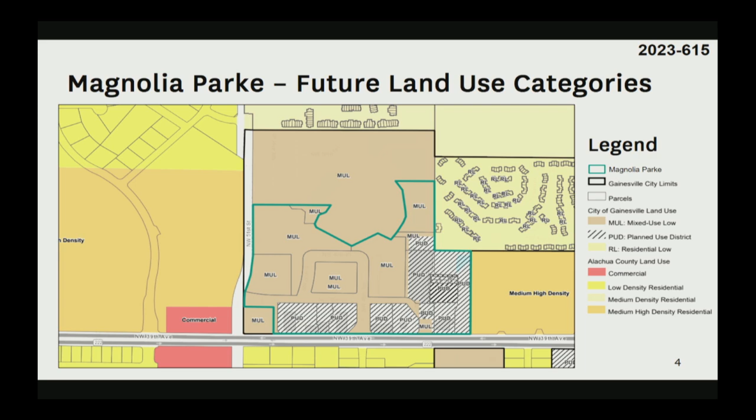Here's the existing future land use categories surrounding Magnolia Parke. Magnolia Parke is mostly mixed-use low future land use, with PUD being on the front in Pods A, B, I, and G, I believe. You can see the surrounding future land uses being a mix of multifamily, like medium-high density residential. There's county future land use surrounding the property, and some City of Gainesville future land use as well.

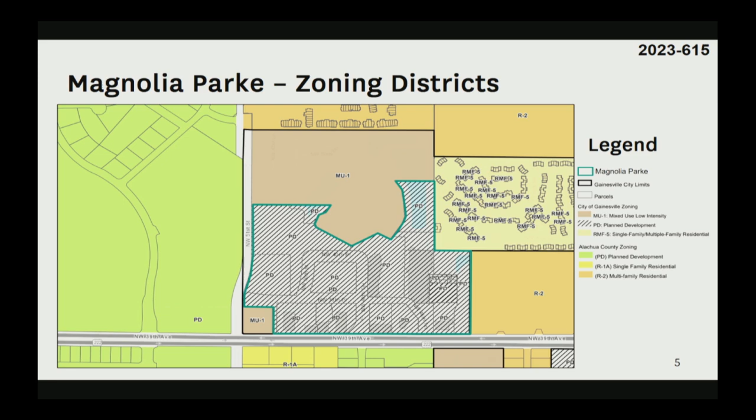Here's the existing zoning. Magnolia Parke is all PD zoning, with mixed use 1, or MU1, City of Gainesville to the north, some residential multifamily to the east, and planned development, Alachua County planned development, to the south and west. Here's the original PD layout plan.

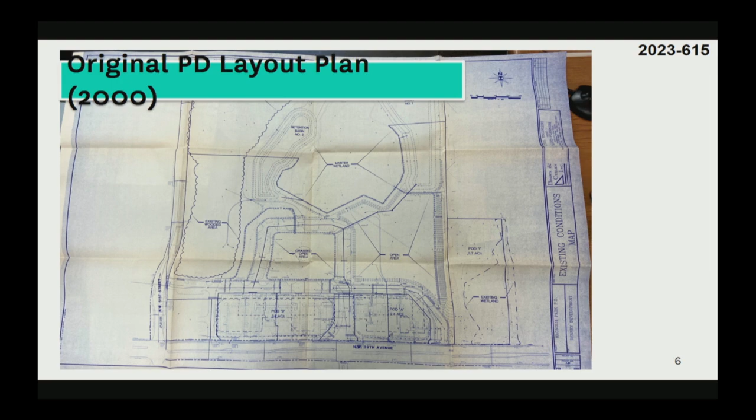There isn't too much to note here other than they've identified some of the early pods, A and B, and they've outlined some of the existing open areas and some of the wetland areas as well.

Here's the revised PD layout plan. It is bothering me that the text isn't within that box, but I'll just note that.

The PD layout plan was revised in 2008 under another PD amendment where they allowed drive-throughs in Pod A, and that is basically what's existing right now. So take note of pods D and E. This here is the area that will be modified with this proposed plan development amendment.

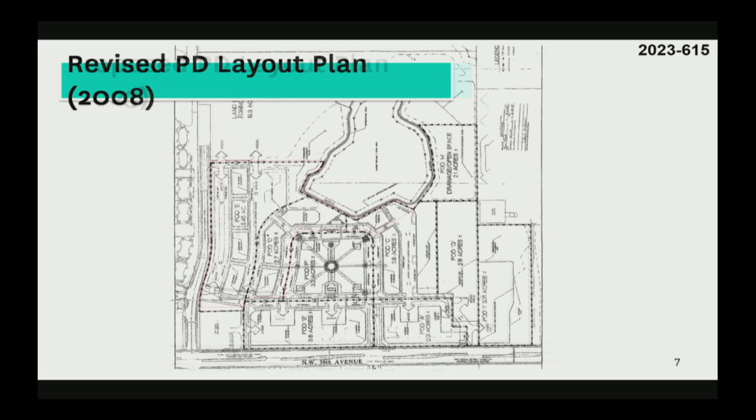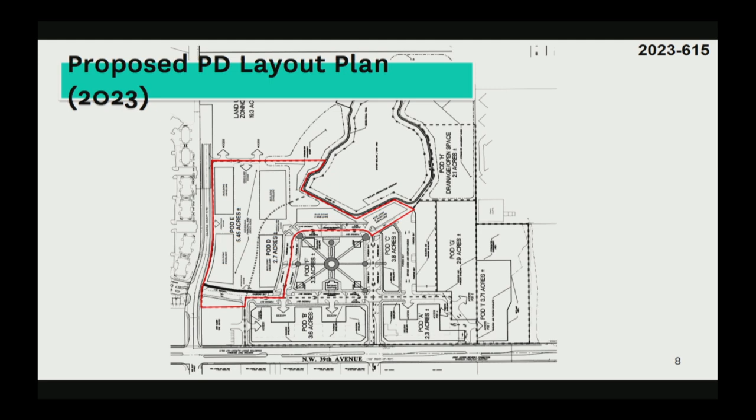Most of the pods stay the same except for revisions to D, E, and parts of pod C. The building envelopes have changed slightly, connectivity has changed slightly, and there's a parking area in the center, which is shown on their conceptual plan.

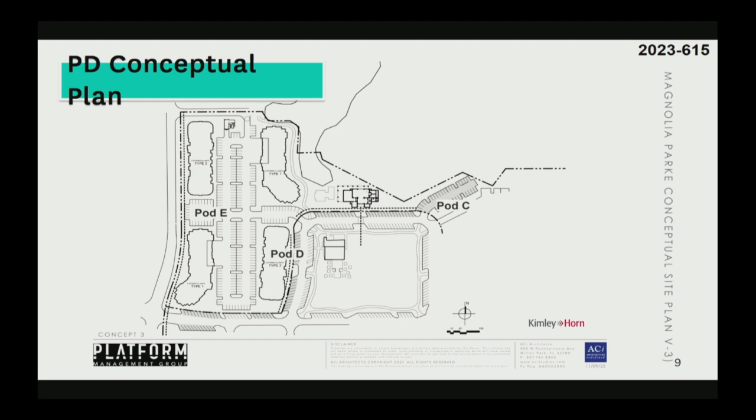The applicant is proposing four main residential buildings with associated parking in the center and some shared parking with Pod C, surrounding One Love Cafe and these two pods. They can speak a little bit more to their vision and their proposal.

The proposed PD amendment meets the PD rezoning criteria as outlined in the Land Development Code. It's consistent with the comprehensive plan in providing integrated communities with a mix of uses within close proximity with each other.

It has connectivity with the existing transportation system and is connected to RTS Route 43. It is also compatible with surrounding uses, and the environmental constraints have been detailed in the environmental report as well.

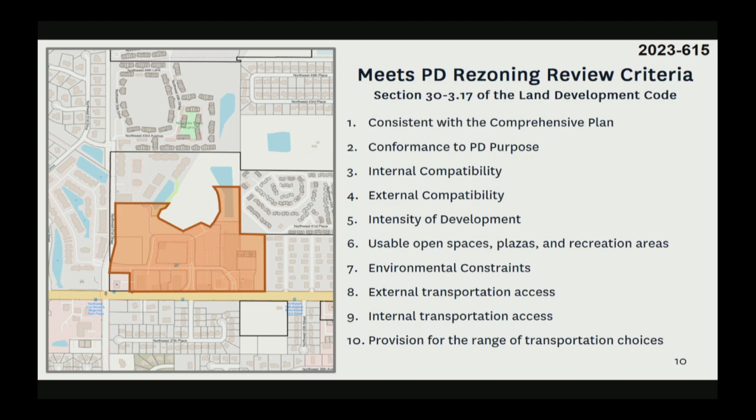That's the end of my presentation. Staff recommends approval of LD 2335. Staff did receive a letter of opposition yesterday, and I made copies that are available to you; I believe it was sent as an email as well. That's the end of my presentation. I'm here to answer questions.

Thank you, Mr. Chan. Any questions for Mr. Chan from staff? Seeing none— sorry, go ahead. I have one question, but it might be better for the applicant.

It has to do with the building characteristics and building form standards, which you all may go more into. Some of the requirements for entrances, for glazing, for building relief seemingly won't apply to these residential buildings. I'd like to see some kind of standards in there for the residential buildings and what they're going to look like. I don't know if you had that conversation with the applicant.

I'm not seeing where that is here, but maybe I'm just not looking in the right place because this was a lot of backup. Yeah, there is a lot of backup—I think the report is like 300 pages or something. I think their presentation might speak a little bit more to that, so maybe hold on to that. I can back up if you still have that question afterwards.

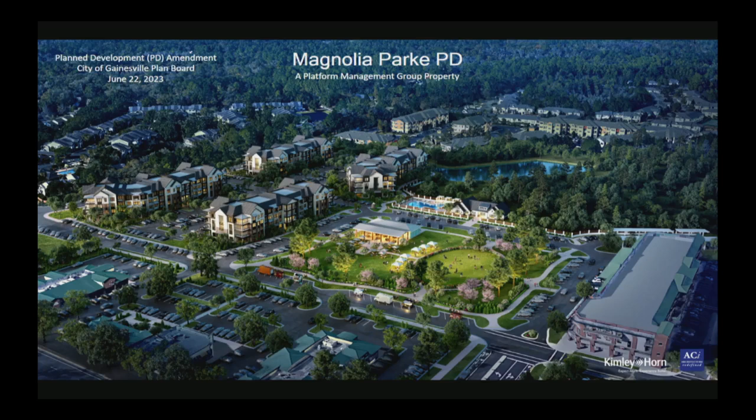So this is the rendering part of this. All this in the background is existing, and up front is existing as well, just so everybody understands what you're seeing on the screen. This is just the teaser. I'll come back to this later, but I wanted to show you the intent behind this.

So context of where this is, I think we all know where this is. It's been here for 26 years, but the closest intersection is right here, 43rd Street and 39th Avenue. Great proximity to employment centers, activity centers, all that stuff.

So I think we know where this is, but just for the record. Nate did a great job as well presenting what's there, so I'm not going to dig down in the weeds of that. Essentially, this is an aerial that was less than a year ago.

So this is the primary portion of the PD we're really asking for the major amendments to. There are some other amendments we're asking for in this area as well, but in general, this is really what I think people are interested in.

Our timeline of how we got here: we had a first step meeting with city staff late October. We had our neighborhood workshop in mid-December. We submitted our rezoning application early March of this year, and after a couple iterations of staff review, here we are today at the plan board.

If things go well, we would like to be on the next available commission agenda. And for full disclosure, in the future our intent is to submit full development plans for pods D and E, and a portion of C, potentially as early as next year. But I'll get into that more in a second.

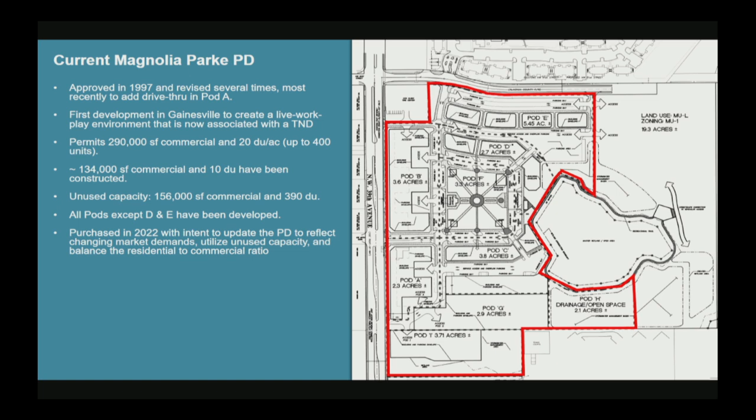So I touched on it a little bit right there, but the reason for the PD amendment, we really just want to update and optimize this old 26-year-old PD to meet the infill goals of the comp plan and the city overall.

The details behind that, we want to utilize the approved development capacity. So keep in mind, approved development capacity. We're not asking for new capacity. This is what's already been approved. We're just trying to change the balance.

We want to allow single-use residential structures. We want to add flexibility to the location and mixture of the uses. We want to increase the maximum allowed stories, remove the building limitations on size and floor area ratio, an older planning metric that's not used as much, and other minor revisions and clarifications to the PD for things like architectural standards, signs, parking, sidewalks, landscape, buffers, and setbacks, all things that kind of bring it up to modern standards and offer some clarity.

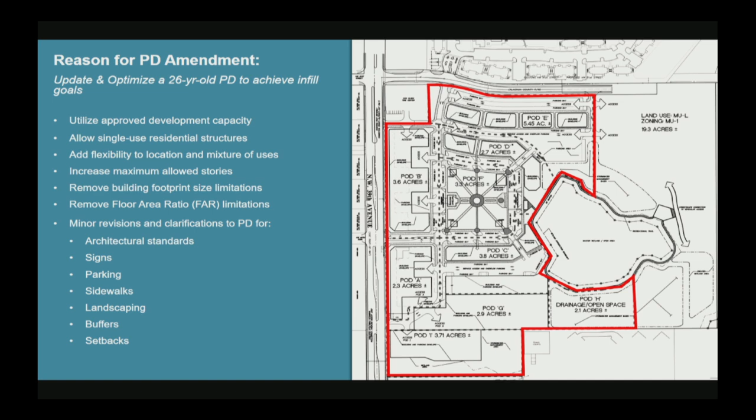So this is the current standards. I'm going to get a little bit down in the weeds, maybe get a little monotonous, but right now the meat and potatoes of this project is really pods D, E, C, and A. Pods D and E are the ones that are undeveloped. Pods C and A are developed. Currently, this area right here is undeveloped as well. We are proposing to do something with that.

That's in Pod C. So to get it on the record, what's currently allowed in Pod A: the max floor area ratio is 0.2. The min and max stories are 1 and 2. There's no max building footprint. The allowed uses by floor are retail and office.

Pod C, 1.3 FAR. The min and max stories are 2 and 4. The max building footprint is 5,000 square feet, and the allowed uses by floor are retail, office on the first and second floor, and residential on the second through fourth floors.

For Pod D, the max FAR is 1.3. The min and max stories are 2/4. The max building footprint is 5,000 square feet. The allowed uses by floor are retail, office on the first and second, residential on the second through fourth.

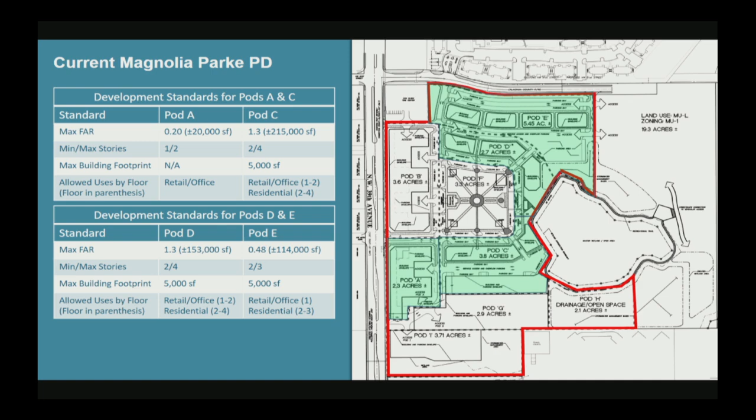Pod E, 0.48 FAR, 2/3 for the min and max stories. The max building footprint is 5,000 square feet, and retail and office are only allowed currently on the first floor, and residential on the second and third floors. So thank you for listening to that. Again, I had to get it on the record.

I will move to the proposed amendment. So this will be a little quicker.

I apologize. So what we're proposing is for all the pods A, C, D, and E, we're proposing to remove the floor area requirement, the floor area ratio maximum, completely for all pods. Specifically for Pod A, we want to increase the maximum stories from 2 to 3. We want to add residential as an allowed use throughout the whole pod.

For Pod C, we want to remove that FAR. We also want to reduce the minimum height from 2 to 1 story. We want that option to go 1 story if possible. Remove the max building footprint requirement, and also essentially allow residential as a use throughout the entire building or pod, regardless of the story.

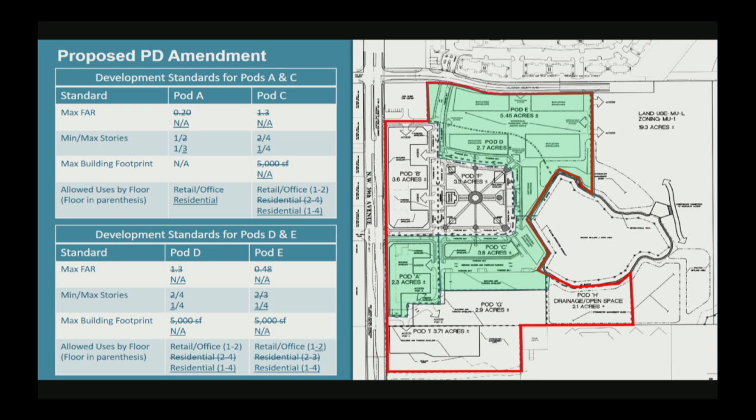So consistency findings, I mean, it's essentially a TND. This is really what comp plans are meant to create.

It's a mixed-use community, serving the daily needs of the residents and really anybody around the area. It provides housing at an appropriate scale. You've got jobs nearby, retail and restaurants nearby, and a park nearby, which you'll see in the rendering. We're going to propose some improvements to that as well. So it really increases the quality of life in the area.

We don't intend to alter the mix of uses necessarily. We want to keep the mix; we just want to change the ratio we're allowed to develop at. So we really want to make it where both uses can flourish. Right now it's just heavy commercial. By adding this residential, this PD will actually be able to balance itself and really function well. Again, the rendering will give you a better understanding of that.

We also want to bolster the shared parking language contained in the original PD. Right now it says parking shall be shared, and we're going to maintain that. We actually performed a parking study with this application just to be sure, with this proposed addition, even though it was an allowed use. We wanted to make sure the parking could handle it, and our study proved that it can.

And then we have the connectivity—it's an interconnected vehicle and pedestrian network. So that checks that box as well regarding the comp plan.

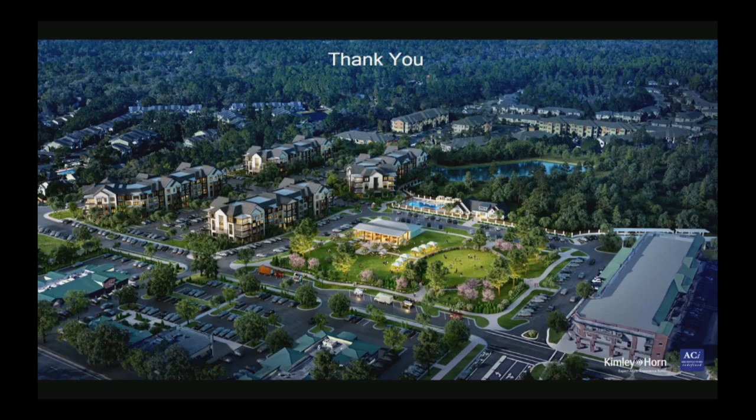Just for clarity, pages 15 and 17 of the redlined PD standards, which are actually table 3. You do see the redline standards where building characteristics start midway through page 15, spill into 16, and then 17 as well, where you'll see more building characteristics.

This PD was originally planned for some self-storage. That never happened. So we do offer some standards, and again, if there's ambiguity, we would be required to meet the city code as far as I recollect.

I think Ms. Sutton has a question. So I would just say most of my questions came from the changes on page 17, because it just doesn't seem to address residential facades or residential glazing. I would hope in something like this, that's mixed use and sort of TND-like, that we would see standards more comparable to what the city has in transect zones, looking for active uses and doors to the units on the ground floor.

I just looked it up, for residential, for multifamily, a transect zone would require 30% on the first floor, 15% on upper floors, and still having some facade articulation or some kind of standards. I appreciate the pretty picture, but I need that in words.

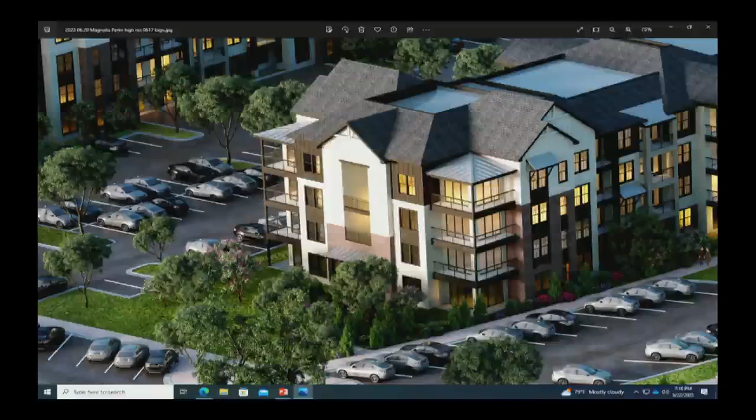So that was the first response. As far as the procedure you were asking about, which board it can go to, I would have to verify this by going back into the code in more detail and reaching out to our legal also. But I actually think that the language in the code says 'appropriate board.' So I think there is already the opportunity for when and if future development meets these thresholds required by code today, to go to a board - staff has the ability to pick whether that would be the plan board or the DRB.

But again, please let me confer with other staff before I give you 100% on that. From what I see here for the thresholds and levels of development review, it says 'appropriate board,' which generally means that's up to staff.

And can you just confirm, if they submit more than 100 units at one time, they will have to go to a board - us or the DRB? It would have to meet these new thresholds. Major development plans are just starting to come back. Right, but that's development plan, we're here on zoning tonight.

But we've put conditions on PDs before that they have to come to us rather than the development review board, so it's not unusual for us to do that. We'll defer to the city attorney and staff on that determination. And you wouldn't have to go to both boards - just us instead of them? It would just be one or the other. Same answer - defer to the legal opinion of the city and staff's recommendation, et cetera.

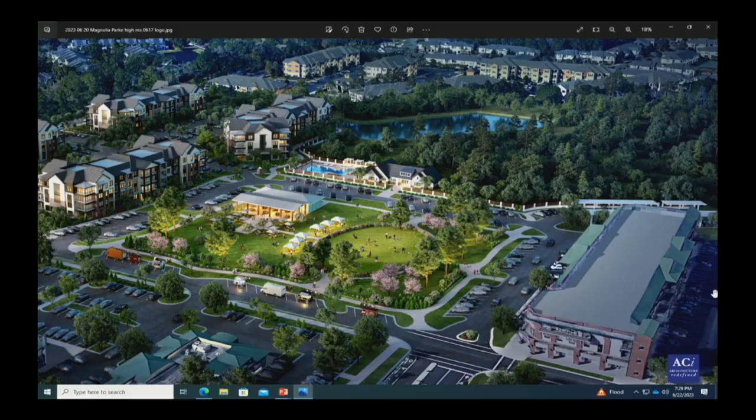In general, if we do agree, except we would like provisions for having clubhouses as a one-story structure. Commissioner, we can clean this up for you. The one-story limitation would not apply to residential buildings, but obviously it would not rule out the parking and the clubhouse amenity. So condition 3, we can clean that up.

Ms. Sutton? It does kind of look like that clubhouse might have some dormers or something. Would you be open to maybe a height minimum? Because it's probably going to be maybe a 1.5-story building height, even though functionally it's only one floor of use in there. Do you have any flexibility in that? Or maybe the office or something is a loft or...

Well, you've interpreted it correctly. We see it as a tall one-story. And we're responding to the cafe as well. We didn't want to put a 2-story building there and not be able to see the beautiful area behind it. So it didn't make sense for this type of development to put a 2-story - you're asking for an elevator, 2 stairs, it just makes it totally impractical.

So for a clubhouse, we wanted to say, okay, this is almost like a home, a big stately home. We thought it would fit in beautifully with the park right there. Just 2-story didn't make sense. But you're right, we think of it as a tall 1-story. So you can walk in, you have this beautiful vaulted volume, you'll have light coming in through the clerestories, and a game room and everything.

You don't want a 9-foot ceiling. So we're hoping to have 12-foot clear, 13-foot clear, and then vaulted in the center. So I guess my question is, if we changed it from stories to a height, what would you be comfortable with? Are you asking for a clear interior space or a roof height? Oh boy, we have it drawn on an elevation, I just don't have that memorized what that is. We're even having a steep pitch roof to get the height up there.

Because I don't know if that would meet what your concern is. If I hear you, but I also am willing to work with the clubhouse if we can settle on a minimum of 18 feet or 20 feet, whatever it is, something that's more comparable to a typical 2-story building. Because you have the pitched roof, maybe this building meets that height requirement as a 1-story building. Is that a way that we can sort of work around it?

We can certainly do to the top of roof. That's not a problem. I think there's some flexibility that we'd like inside. For instance, you wouldn't want to walk into your office and have an 18-foot high volume inside your office. So we want to be able to have smaller spaces and larger spaces within that volume.

To the top of roof. Yeah. I think we're more concerned about the look from the outside. The roof height is what we're concerned about. To the top of roof, that's what we're asking. Because we don't do building permits, we don't know where your ceiling's going to be in there.

Right, so we're concerned about what it looks like from the outside and just having a substantive structure. And then in the future, 10 years from now, when someone's coming in, they think really they should probably do 2 stories because they've got to meet this minimum height requirement. Sure, right, let's do a minimum height to the top of roof. That would be great. Okay, and do you have an idea of what you'd be comfortable with?